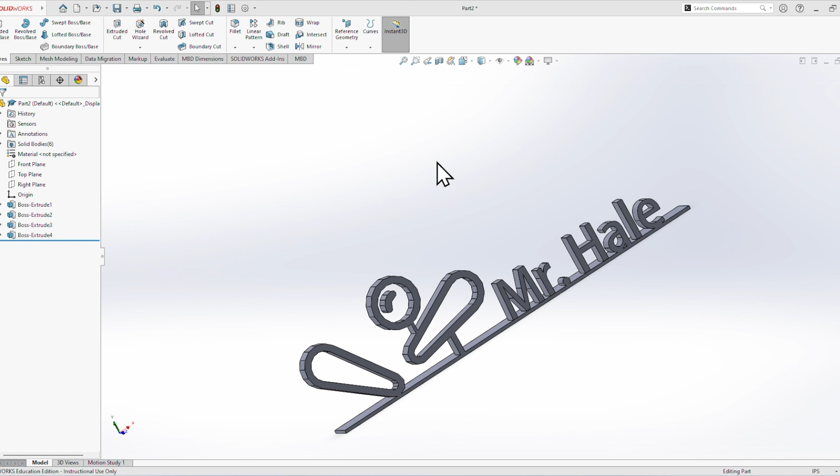Today's project, we are going to be creating a nameplate. And the main thing we're going to be learning today is how to import an image that's an SVG into Solidworks. SVG stands for Scalable Vector Graphic.

What a vector graphic is, is an image that is outlined, so you can stretch the outline. If you were to stretch a picture, the resolution might get fuzzy or look distorted. But an SVG file, since it's a scalable vector, means everything is outlined, so you can resize it to any size you would like.

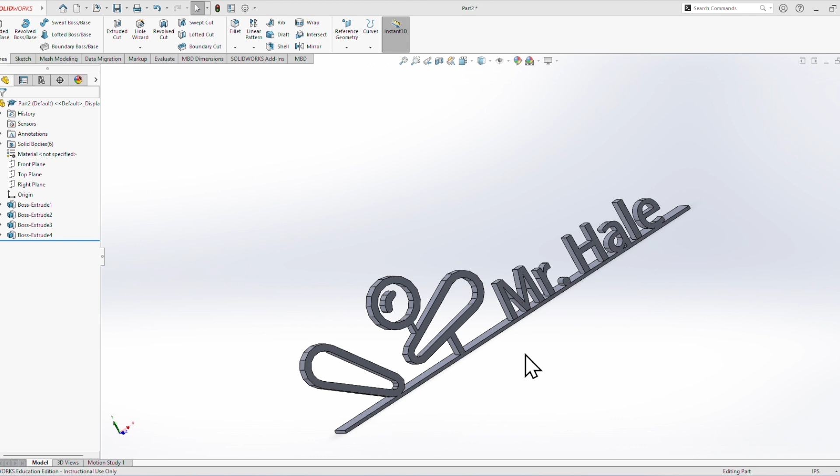Now a few things to note before we start this. I chose a little pinball icon here and put my name on it, so this is my nameplate. Let me rotate it a bit. This is 2 inches deep, and my letters are 1 inch deep.

If you want to make your letters 2 inches deep, that's fine, but then it can be 3 inches tall. So I'm going to recreate this here shortly.

But something to note here, I have some freely floating items. In fact, the inside of this pinball right here, I needed to build a support in order to connect that. So this is standing upright.

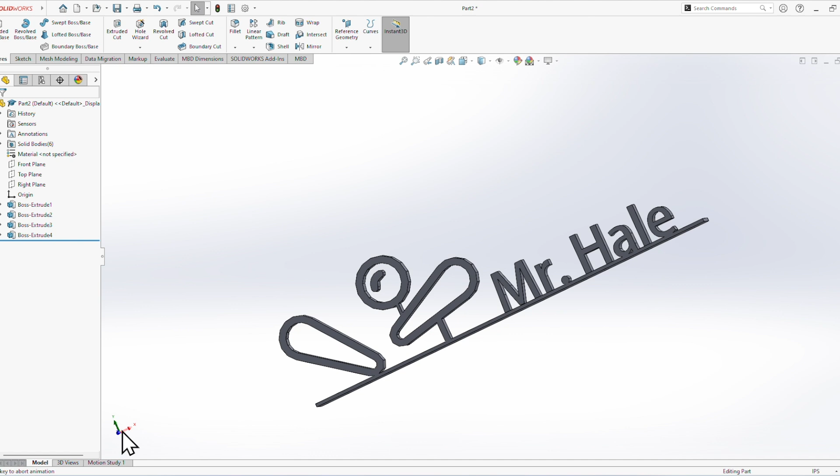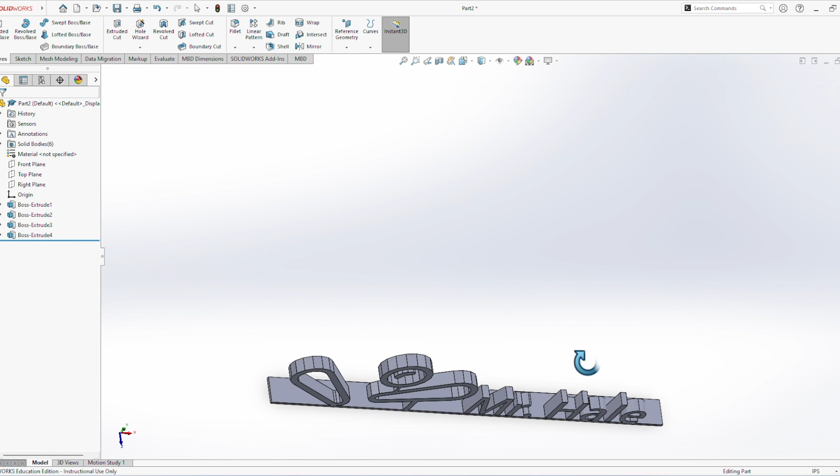Let me go normal to, we're on the top plane here. So it's going to print by laying down on its face. So it's going to actually print like this. This is the bottom. If you would like for the print to be face down, this is how you can create it. Otherwise, you might have to either reverse it, or when you do your extruded boss, extend it all the way back. I'm going to rotate it so that it is flat on the bed in order to print.

We're not going to print them upright. We don't need supports on this. We're going to lay it down flat. So this is my bottom. When you print on the bottom, sometimes it shows up a little bit smoother.

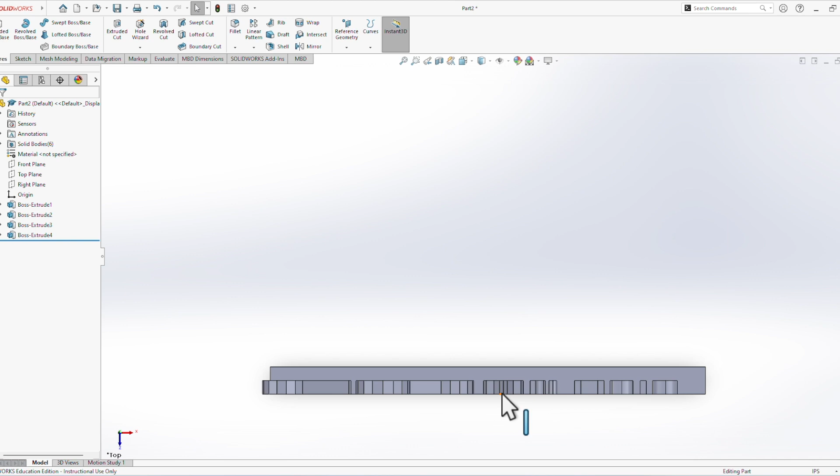I am not going to build what are called rafts, or a brim for that matter, which is a little bit of an outline that goes around the shapes either. So as we build this, we need to make sure that we are building some supports here, so that when we stand this thing up, we have all of our items supported.

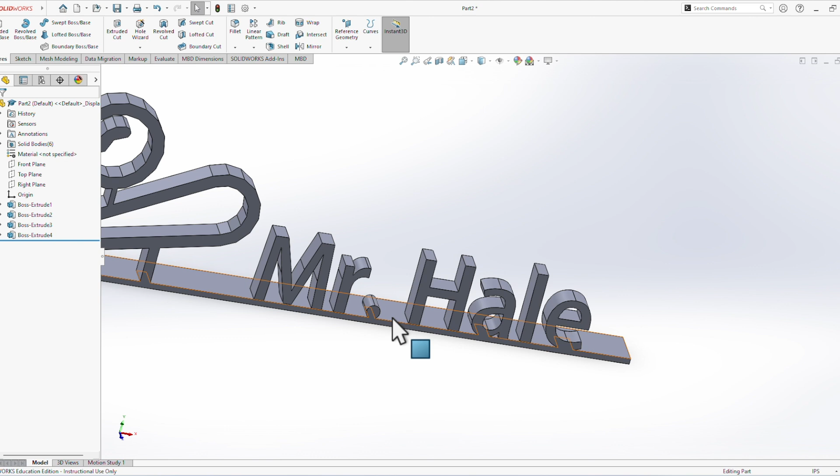Also, I was lucky with this font, and I don't have any letters in my name like a J or an I that have a floating little dot. If you have a floating little dot, you're also going to have to connect that. So let's go ahead and get started with the project.

The first step that we need to do in order to create our nameplate is to pull the image that we would like first. So I'm going to go down here and open this up. These are the 2 sites that I have on Schoology.

We need to look for an SVG file. We're going to take this file and convert it to a DXF, and I have that linked in Schoology as well. So what I did on this site is I simply typed in pinball. You can type in anything you would like. They're going to be simple images.

Mine are like so, and you need to make sure that it says SVG. That means that it's a scalable vector graphic, meaning we can stretch it and resize it without losing resolution. This is a PNG file, which is a picture, so you cannot use this picture here.

When I find one that I would like, let's say I want to use the enclosed one this time, not the open one, I'm going to select SVG. What it's going to do is download it. Mine is called Game 5 SVG, and I know it's saved in my downloads folder.

Once I have this, I'm going to go to the other site in Schoology, and I need to select that file from the downloads, Game 5. It is an SVG, I can confirm that here, and I hit Convert.

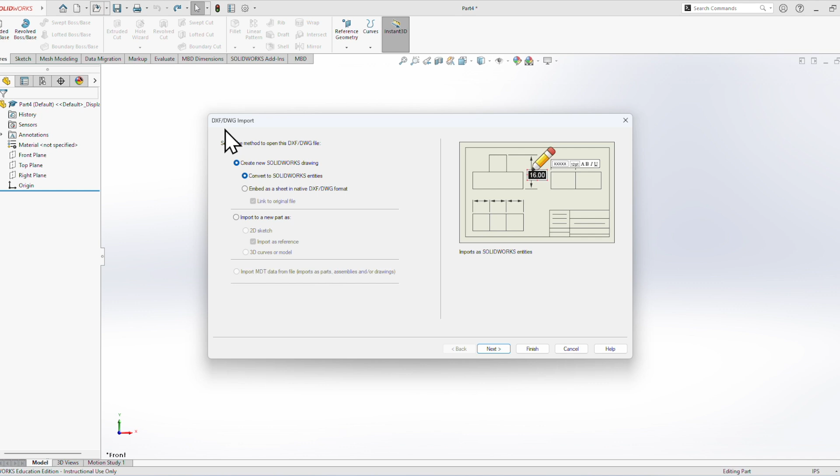And I have a few options here, and this is very, very important, so please pay attention. We need to import this as a new part. We're not doing it as a drawing, and we also want to make sure that we are not importing it only as a reference. We're editing it as a sketch in Solidworks.

So it should look like this. Hit next, we should be able to see our image here. Great, and I hit next again and finish.

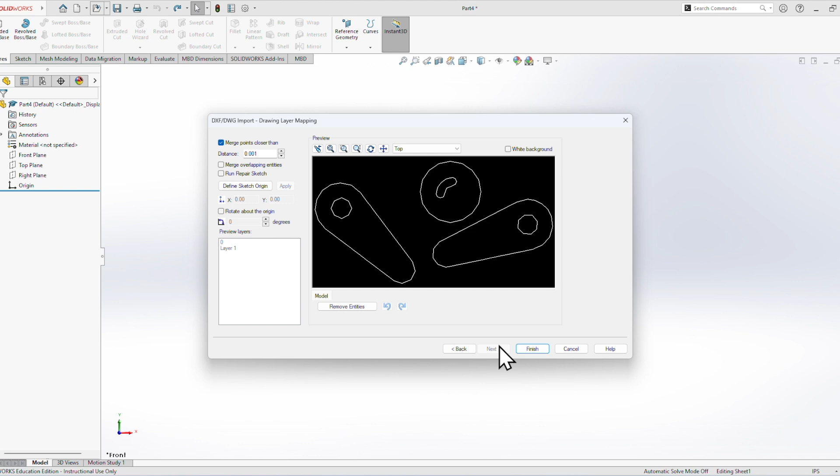So here I now have my SVG file. And once I have this model selected, click on the model here, I can do the exact same thing that I could with any other sketch. In this case, I am going to do the extruded boss, and I'm going to do it 1 inch. So I have a 1 inch extruded boss.

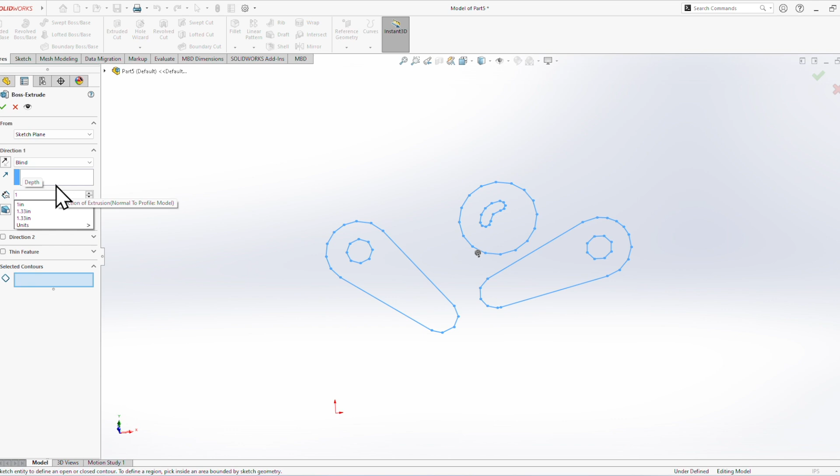It's asking me now, hey, I see some holes. What parts do you want to extrude? It can't extrude all of it. So when I have this, I need to click on what shapes I would like to have extruded.

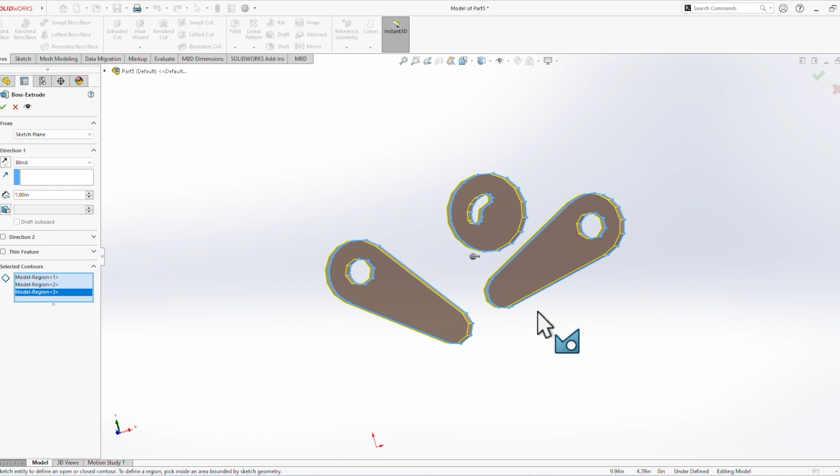Now very shortly we're going to talk about this button, which is going to invert, and this might come in handy later depending on how you are designing your nameplate. So now that that's done, I can hit the checkbox here, and I now have

a 3D shape. So completing the next couple steps is going to be a little tricky because it is very, very hard for us to resize all of these parts of our SVG. So what we're going to do is just draw everything proportional, and then I will resize everything to the dimensions I mentioned at the beginning, which is 8 inches wide, 3 inches tall, and 2 inches deep. So whatever is the one that needs to fit within those parameters is how I will resize this.

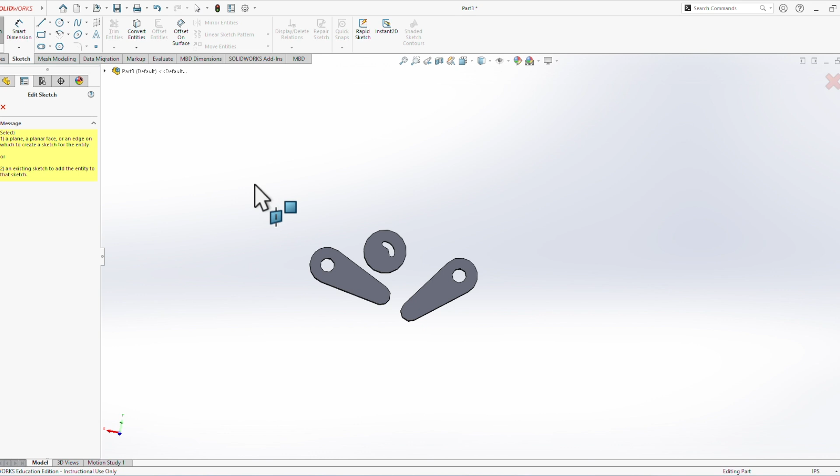Next, we're going to draw our base. So I selected the rectangle tool, and I'm going to choose my image here. Let me zoom out a little bit. I'm going to put mine along this way. Let's say I want that much space for my name.

Great. Okay. Now this is going to be an extruded boss. And for mine, what I did is I did 2 inches.

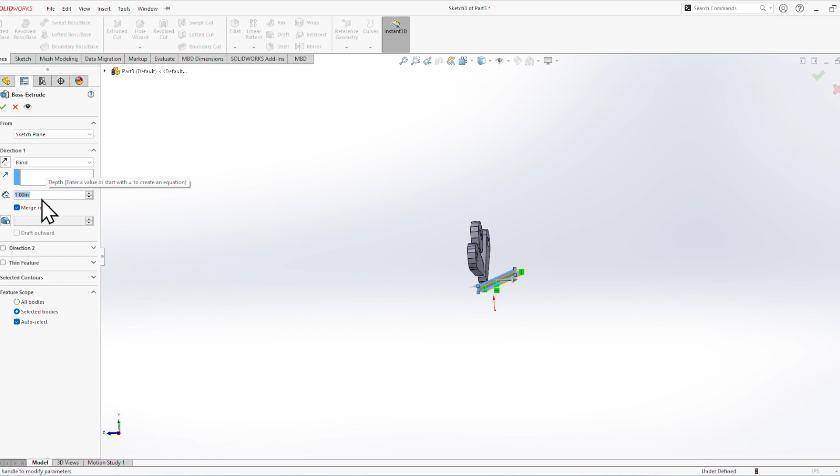Now here's what you might note, that might be a little tricky, and I mentioned this before. If you look here before I click OK, you notice that it is facing out the front, so it's not underneath it. I'm going to click this reverse direction, and then it's going to show up on the other side.

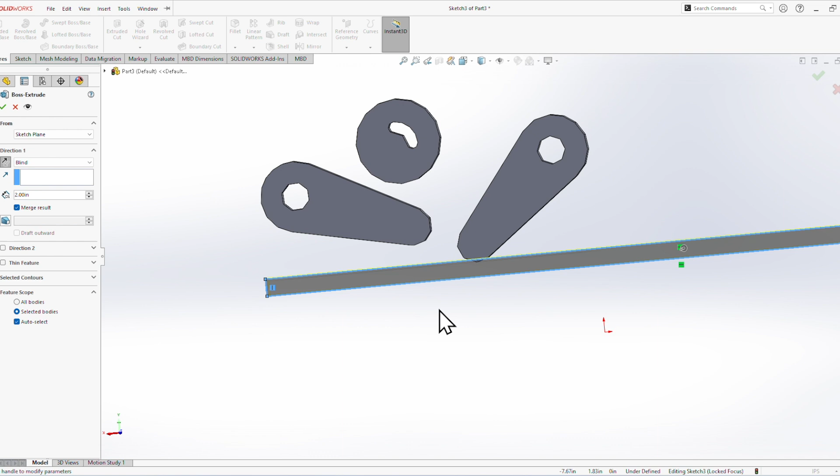As long as I am within the bottom of my shape, it should connect, which it does. So now since I have 2 floating pieces here, I need to connect those as well.

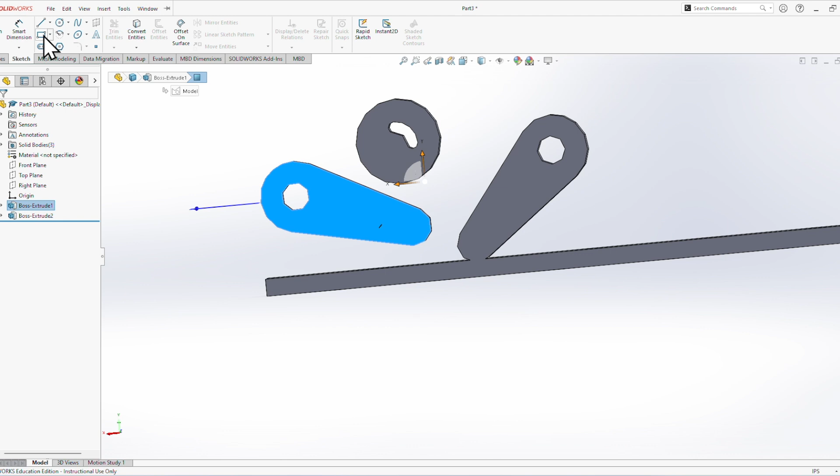So let's go to Sketch. I'm going to draw a rectangle, and I'm going to go from here. It's going to ask, where do I want to start drawing? I want to go from here.

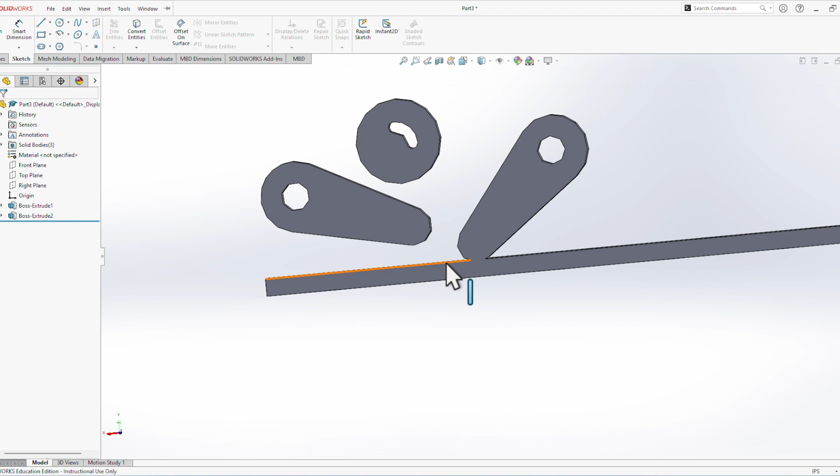So now I have 2 freely floating shapes here that I need to connect to the base. So I'm going to go back to my rectangle tool again. It says what plane, I choose that pinball flipper there, and I'm going to draw a shape. I have an intersect, overlap and intersect.

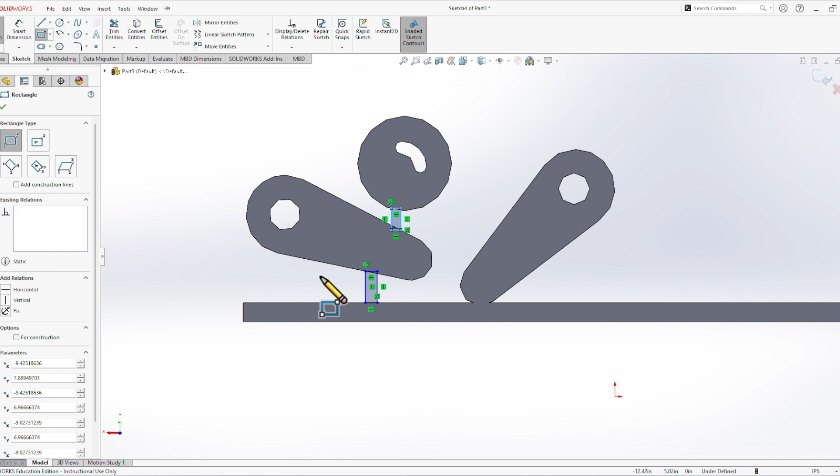Let's do the same thing on this one. Overlap, intersect. There we go. Now these, once again, were 1 inch. So I'm going to make these an extruded boss of 1 inch, and also I need to flip it in order to connect it. So flip it here. Great.

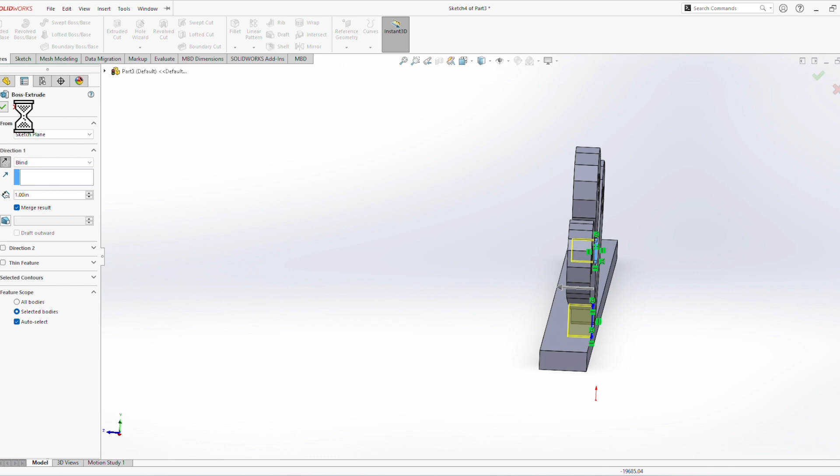Finish. And now I have my connection points. So if I click off of it, that is how my nameplate looks so far.

Now we're hitting the home stretch here. I'm going to go back to Sketch. I'm going to choose my name. Okay, again, what plane? So I'll just click on this. You can see that it's all one, all connected now.

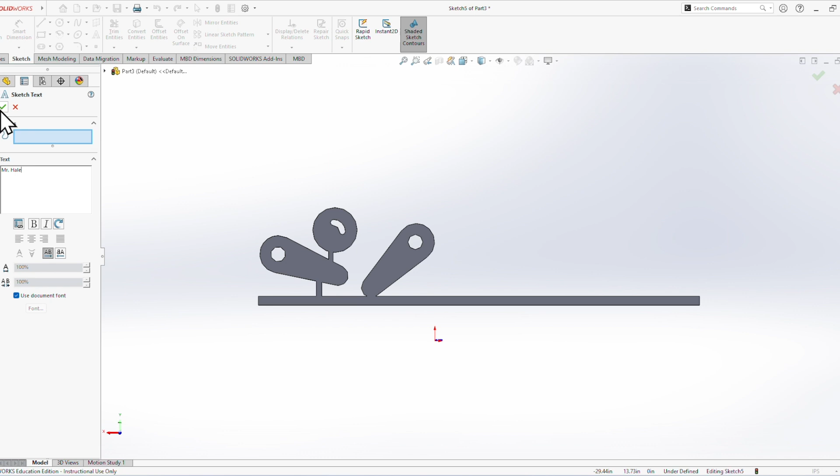And I'm going to type Mr. Hale. Now my name showed up down here. I'm going to need to resize it however big I would like for it to be, and I can go back and change this over

and over again. So let me just double click on it, and let me choose a font, and I would highly, highly recommend that you choose a bolder font, not a thin font. You can see the previews down here. It might print a little tricky, so let's find one.

I'll pick, let's see here. The thinner the font, the more difficult it's probably going to be to print. How about this one? You can even make it bold if you would like.

I'm just going to have a starting point, let's just say 3 inches tall. I don't know how that's going to work on here. Not bad. I can make it a little bit bigger.

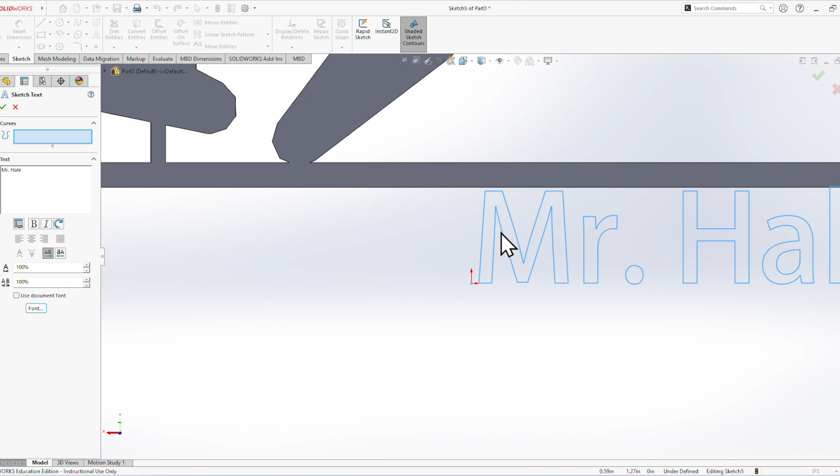All right, let's select this so that I can drag it. I'm going to drag this up, and if I put it right on this line right here, that's where it's going to start, right there. And now I have it on that line.

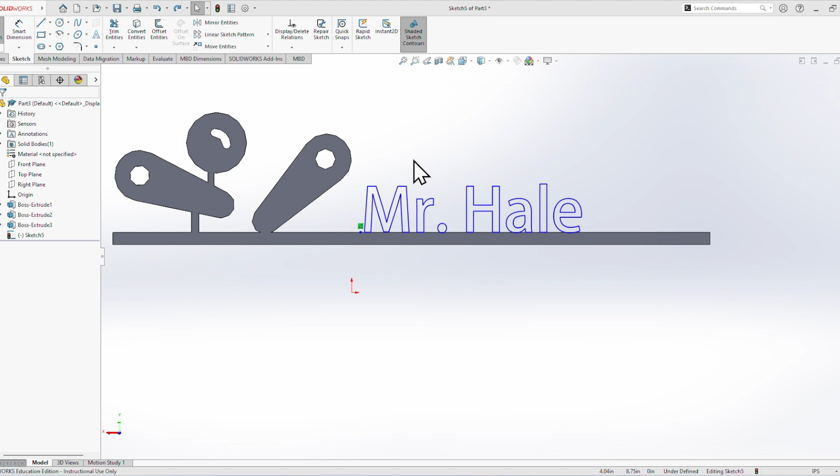I need to resize this just so it fits this space properly, and I'm going to have to play around with it a little bit. So if I double click on this, I'm going to go into fonts.

When I have it at 3 inches, I'm going to say that it probably needs to be, let's take a guess. I'm going to say maybe 5. Let's see what 5 does.

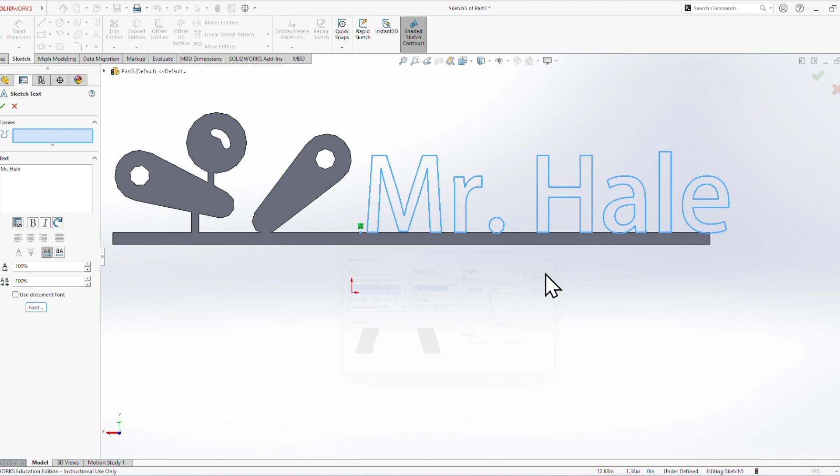Now yours might be different, okay? So don't necessarily choose 5. I like this. It's overhanging a little bit, but I'm going to drag it back into the flipper a touch. So let me zoom in here.

Actually, let me save this resizing first. And then I should be able to grab this and drag it down. How am I looking now?

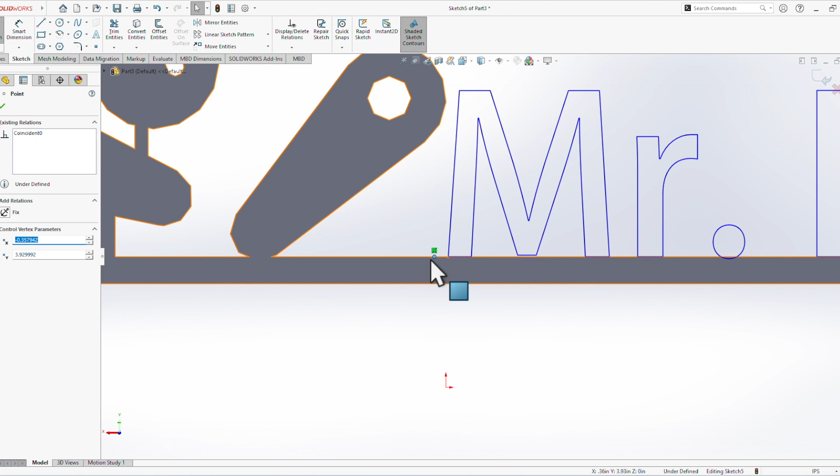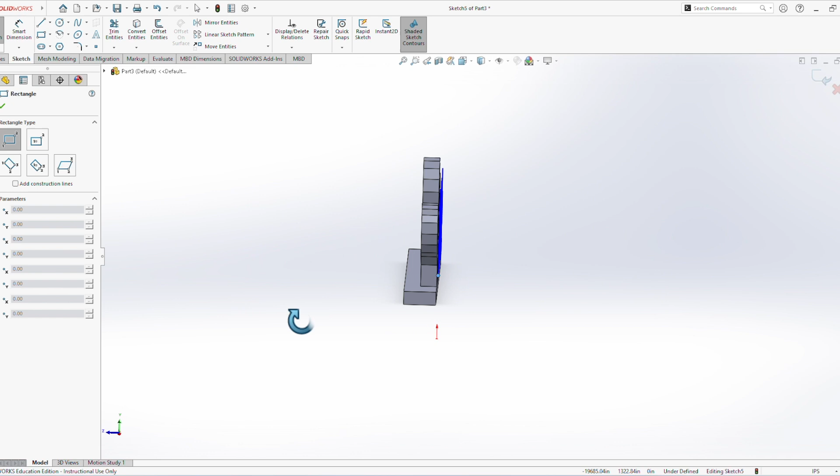Love it. Beautiful. Now once again, if I had any freely floating things like this flipper here or this pinball, I would need to sketch a rectangle and do an extruded boss in order to connect them, and this is going to be just 1 inch.

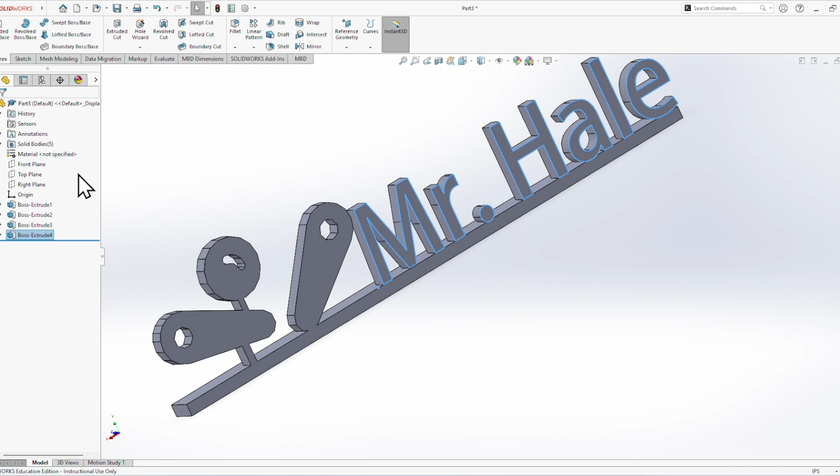So now that I have that and it's selected, features, extruded boss, let's go 1 inch. Okay, going the wrong way once again, so let's flip it. There you go. And I'm going to hit check, and there is my name tag.

Save it as an STL, something that some students have been struggling with. If you already have it saved and you want to save over it, or let's say you saved it accidentally as a SOLIDWORKS part, you need to go down to Save As and save it as an STL.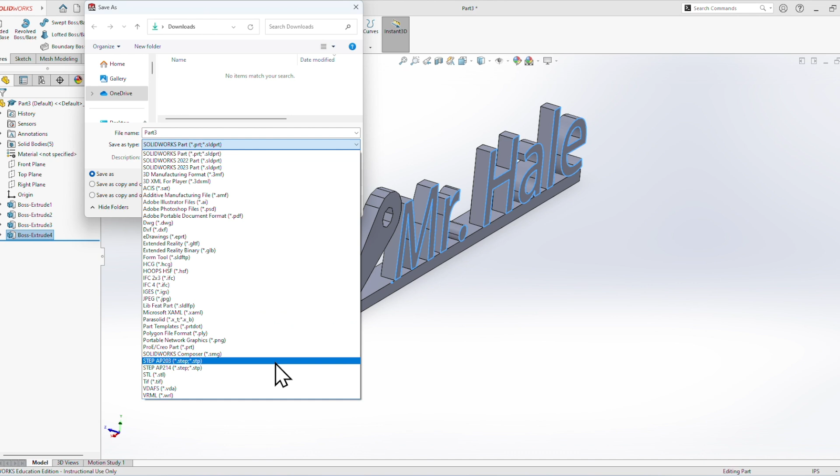Once again, upload it to the Google Drive Dropbox, have it be the color and then a space and then your last name. It'll be pretty obvious who these belong to once they're printed out, but in case you want to put a nickname, this is where I'm going to be checking to make sure that you put something in the Dropbox in order to give you credit for this assignment.